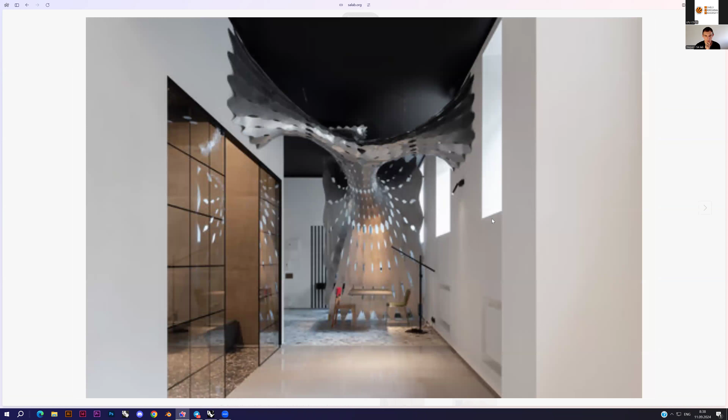It is designed with these parametric structures, mostly made of aluminum, and they are really thin, just 1 millimeter thin. We used Rhino and Grasshopper to design those parametric structures, and a lot of digital fabrication.

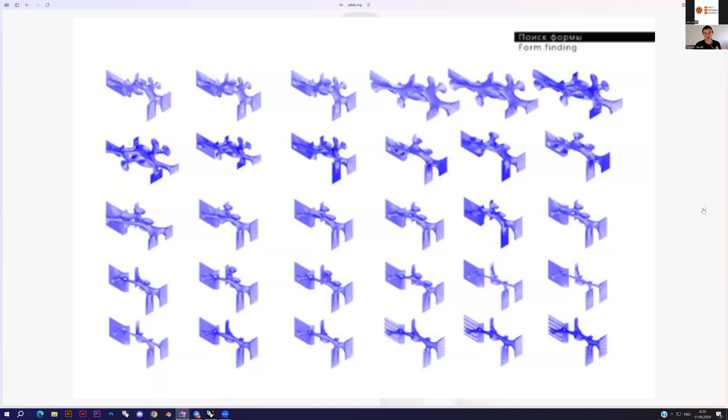We had a lot of form finding process going here. So we started with some simple shapes and then started experimenting, trying to develop a structure that would divide the space of the showroom while at the same time preserve its continuity, creating one space, yet divided into different functional zones. That's why we were experimenting with those structures.

At first we had an option with like 10,000 pieces, but then using Rhino and Grasshopper, we managed to reassemble it using 485 pieces, which is a lot less than 10,000. And of course, it takes less time to assemble, produce, and build such a structure.

This thing you see here in the image on the right was built, assembled on site in just 1 week, I guess. And altogether, I guess it took about 3 to 4 weeks to produce drawings, laser cut all the pieces from aluminum, and then assemble it on site.

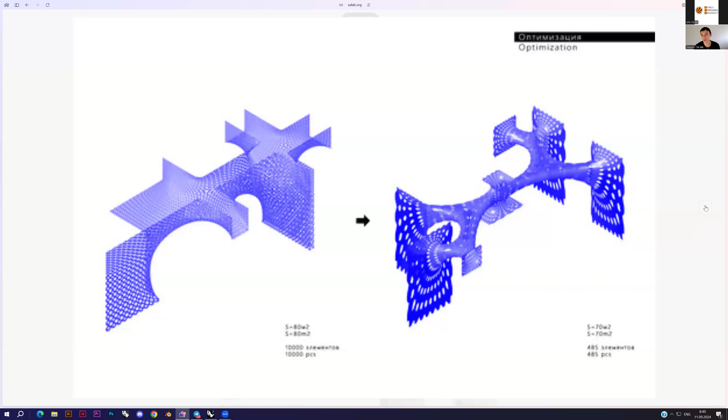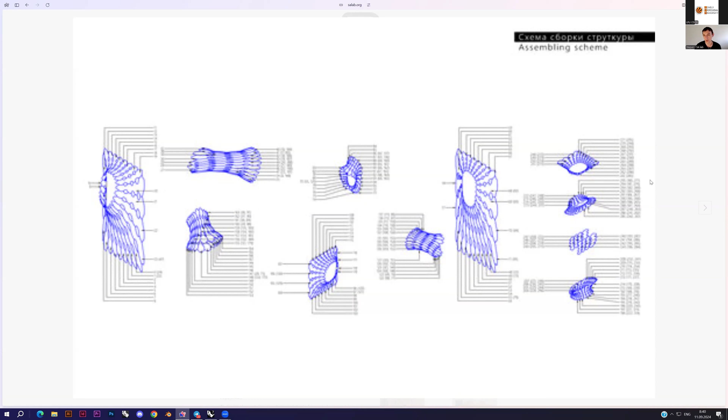This is basically how the cutting process and the drawings for the laser machines look like. It's just flat sheets of aluminum with some details on them. Later on, when everything is assembled on site, those flat pieces begin to take 3D curved shape and their final form, and they are grouped into modules, and then those modules are assembled together into a single structure.

In 2020, when COVID happened, we were about to design a few pavilions for a science festival happening in Moscow and then moving to St. Petersburg. We were supposed to create stage pavilions for this festival, first assembled in Moscow and then transported to St. Petersburg. But then COVID happened, and the festival that was supposed to happen offline had to move online.

We ended up creating virtual spaces for the festival. We created 2 virtual spaces using the Cellular Automata algorithm, which we are going to discuss today further on. Those spaces were used to walk around by the visitors.

Let me just show you so you can walk around, explore the space. You can climb on top of the tower. There are elevators and various steps and so on that you can take to climb on top.

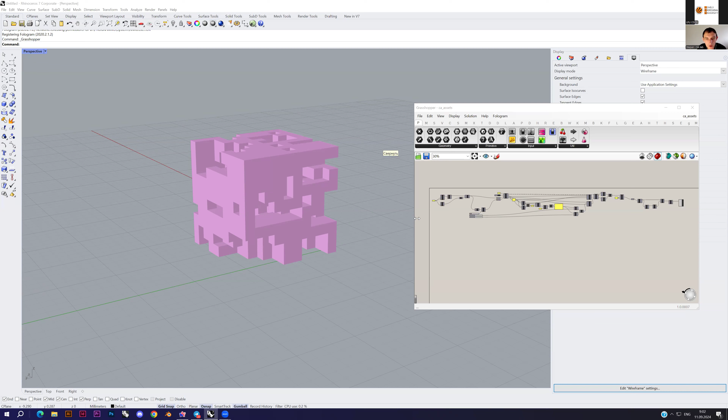So this is Rhino and this is Grasshopper. Grasshopper basically is an extra feature for Rhino. Long time ago, it was a separate program that you had to install to use with Rhino, but nowadays it's all integrated into the Rhino interface, and to launch Grasshopper you just need to use this round green button on your standard panel in Rhino.

And what is Grasshopper? It is a visual scripting language. It's kind of a programming language, but it's made with gray rectangles, boxes. They are called nodes, I guess. And each node is just like a simple command that is executed by your computer. It has some inputs that are necessary to control the execution of the command, and it has some outputs providing the results of these command executions.

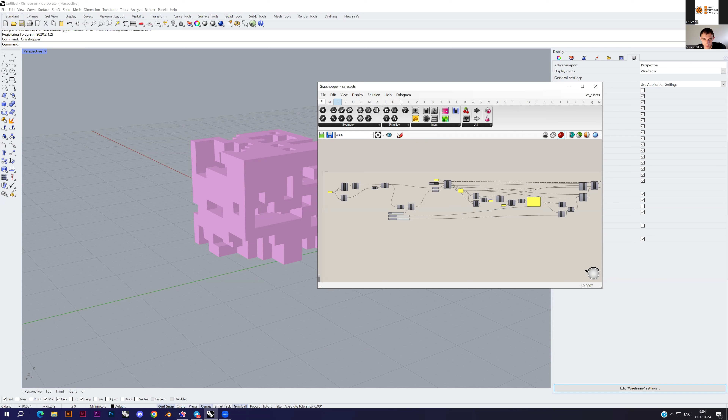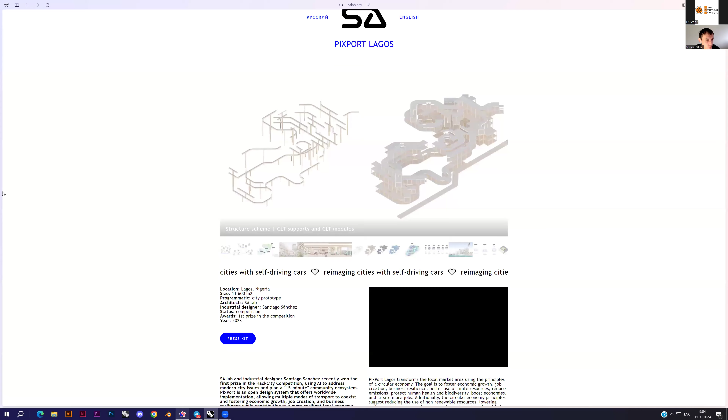So all the nodes in this file are native and available in the standard Grasshopper window, except for two. The first one is called loop start, and the second special node is called loop end. And those nodes are provided by a plugin named Anemone. And if you don't have this plugin yet, you can go to food4rhino.com and search for Anemone, and here it is.

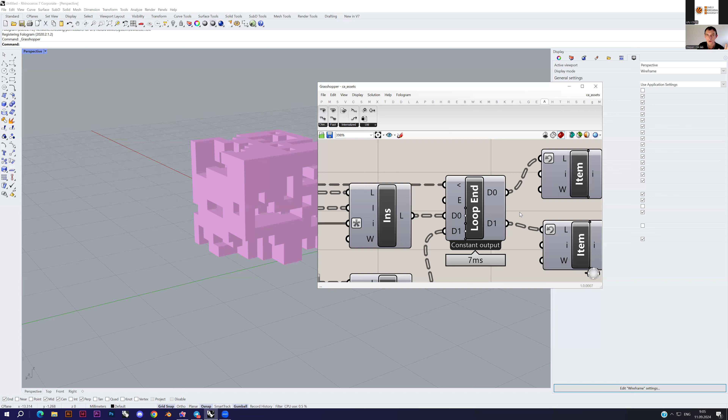So it was not updated, I guess, long ago, and what you can see here, the last version is 2015, but it's still working. And the idea behind this plugin is that it helps you create loops, some pieces of code that are repeated over and over, depending on how many times you want to repeat this code. I guess there are other plugins providing the same functionality as Anemone, maybe Hoopsnake or something like that, but for this definition I used Anemone.

And let's try to understand what is cellular automata and how we can implement this algorithm. So basically, cellular automata is a kind of mathematical model that was invented in the 1940s by two scientists from the United States. They were working on the idea of robots and kinds of machines that could reproduce themselves. So they were trying to find a mathematical description of this process when a machine can rebuild itself, repeat itself, and that's how they ended up inventing this cellular automata thing.

So in the classic case, it is a 2D grid, two-dimensional grid. For example, I have a grid like 4 by 4, but usually it's more. And I have cells in this grid. For example, here is the cell that I'm looking at. And this cell should be familiar with what's going on. And it depends usually on how many neighbors are alive or dead.

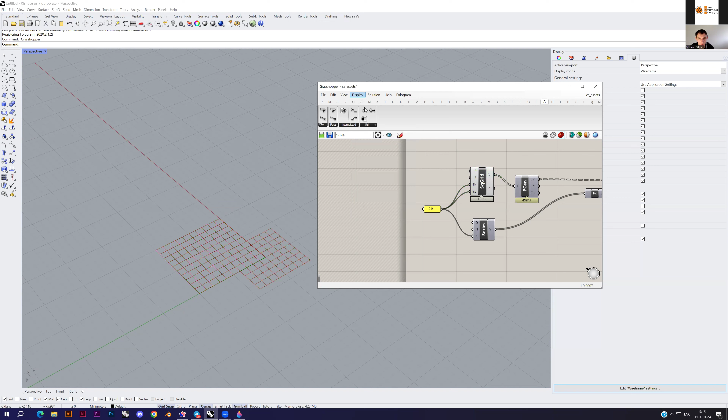So in our Grasshopper file, let me disable all I have and see what we have at the beginning. The first thing we create is a grid, created with the square grid component. It creates a grid of rectangular cells. Each cell is 1 by 1 size, and we have 10 cells by X direction, 10 cells by Y direction, and we want to make it all 3D.

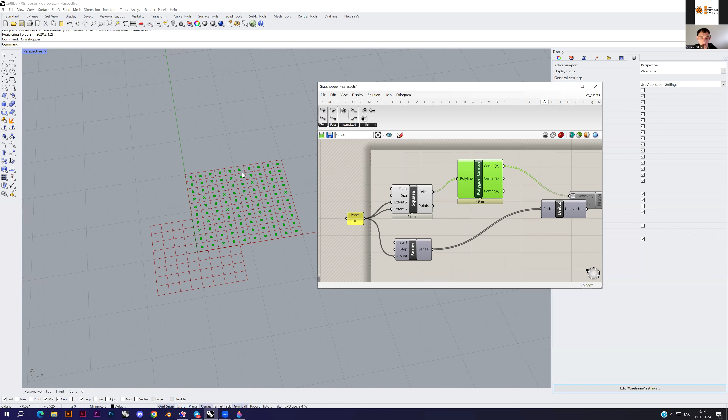We're going to experiment with the same logic that I just described, but implement it in a 3D grid. The next thing we need to do is to grab the centers of our cells and move it up to create a 3D grid structure. How do we do this? We grab our centers, we grab the move component, we have the direction of the movement - it's the z-axis, so we use unit z vector.

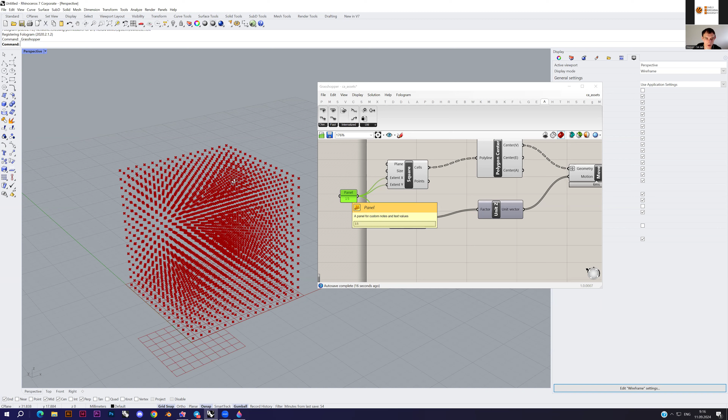Then we need to provide the amount of times that we want to move our initial points in the z direction. To provide this, we use the series component, and for the count input here, we use the same number of cells that we used to create our grid - so it's 10, or you can change it to 15, for example, to create a bigger structure. It depends on the hardware you use - the more advanced hardware, the more cells you can generate, the more complex structure you can create. I start with 10 because it's simple and easy to simulate, so you can understand how it all works before building something complex.

So if you're working with Grasshopper for the first time, you may be wondering what kind of wires these are. Some wires are depicted with a single line, for example here, and different types of wires depict different types of how information is structured and delivered from one node to another node.

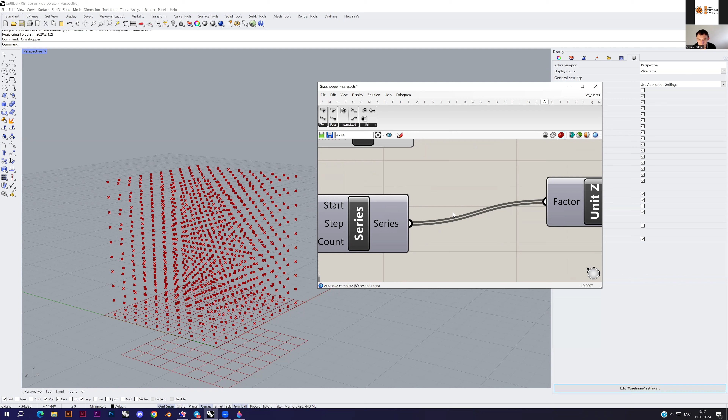For example, here I have a panel node, which is just a simple text node in Grasshopper, and I have a single line wire connection here. This means that in this wire I have a single data element being transported from the panel to this node. Here I have a double wired connection, meaning I have a lot of different numbers or data elements - here I have 10 numbers. So here I have just one number and the wire is a single line, here I have 10 numbers and it's a double wire, and here I have a dashed wire connection.

And this means that I have different lists with different amounts of data inside. So for example, if I plug in a panel, I can see what's going on inside. I see different lists like this one, 0, 0, 0, and the next one is 0, 0, 1. And in every list is some kind of data. For example, here is a rectangle depicting the grid cell.

You can think of lists in Grasshopper as boxes, for example, and you can have different items, a different amount of items in different boxes.

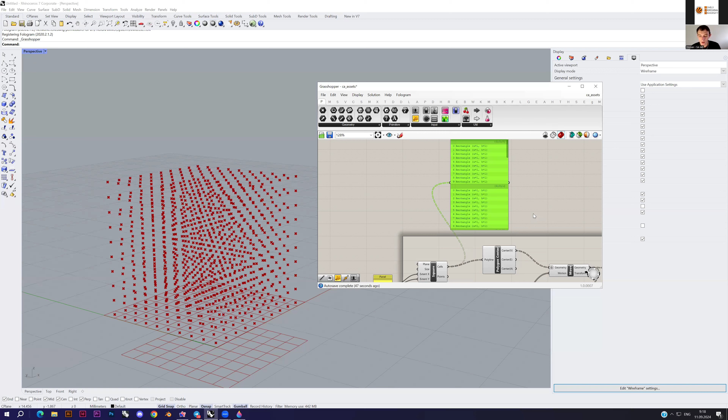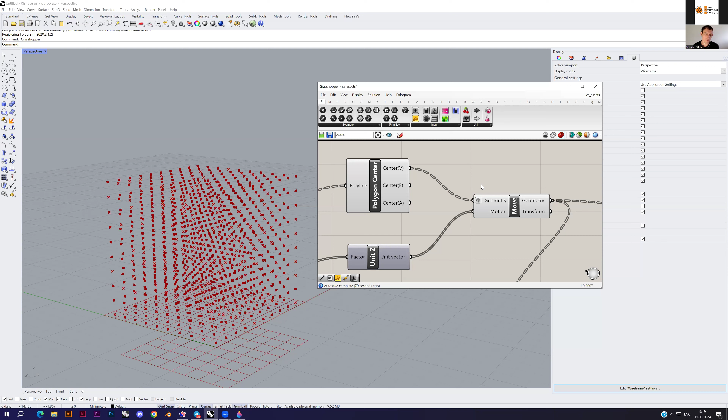There are different commands to transform and operate lists or data trees - it's also another way to call them. The most used commands are flatten, that combines all the data items in a single box, or graft. Graft command takes all the data items and puts every data item in a separate box, for example, in a separate list. And we need this graft command here, on the input in our move geometry node, to create this 3D grid.

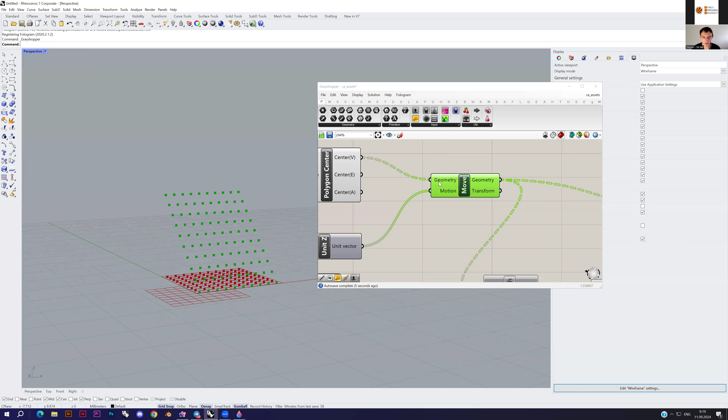If we don't use graft here, for example, you will end up with something like this. And if you use graft, you'll end up with a normal 3D grid that you want for our algorithm here.

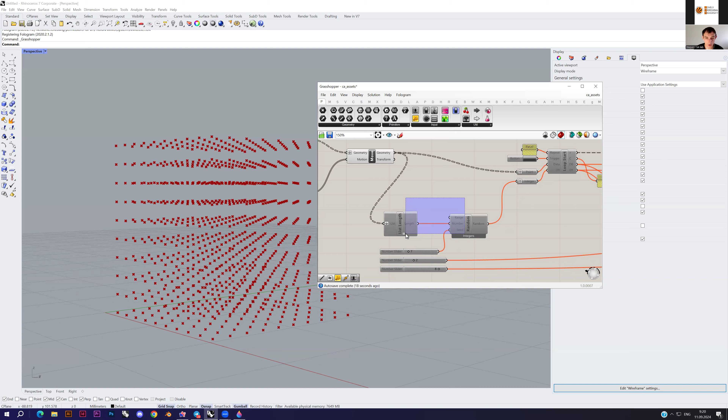So the next thing we're going to implement here is the random initial states. How do we do this? We just use a random component here. We calculate the amount of points that we have in our grid. We generate random integers, either 0 or 1, to generate random initial states for our cells.

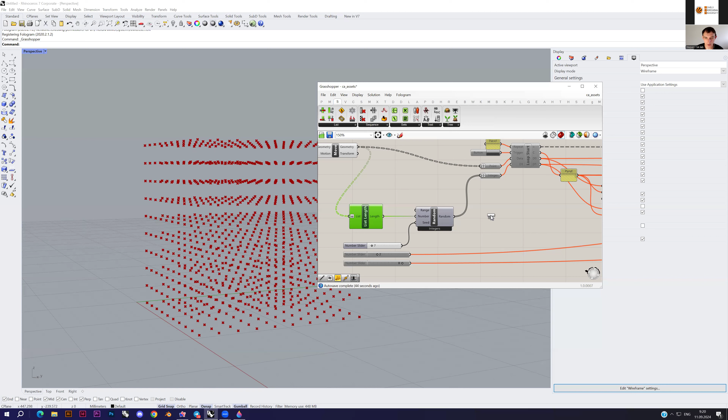And if we just see what happens here using the cull pattern node, you'll see that we have something like this. So we have our cells, but then some of them are just randomly removed. And we only have cells that have the random 1 state, and those that have random 0 state are removed from the visualization in our Rhino screen.

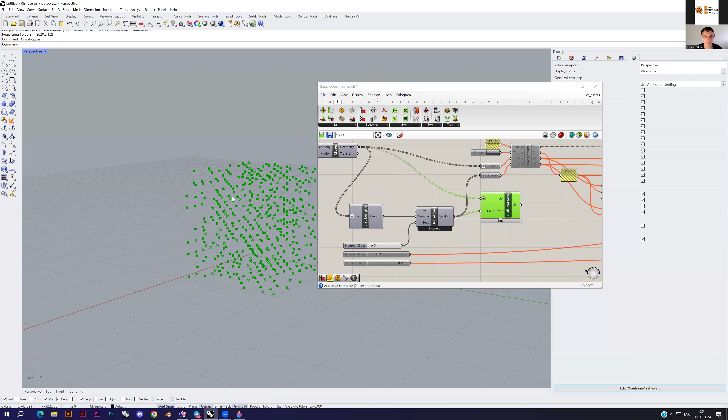But we need to record 0 states as well. We are not just removing the cells, we just provide them with different states, and we need to record all the states for us to be able to operate on them later.

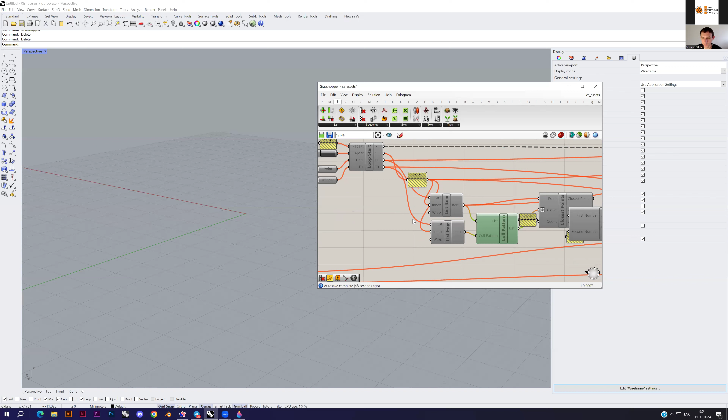Okay, let me just move those nodes a bit and get some space.

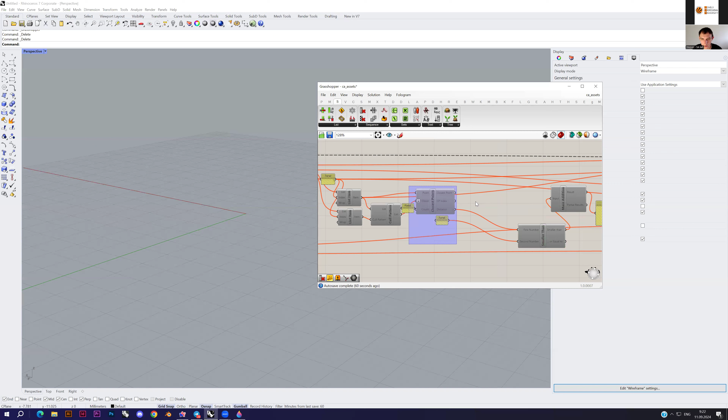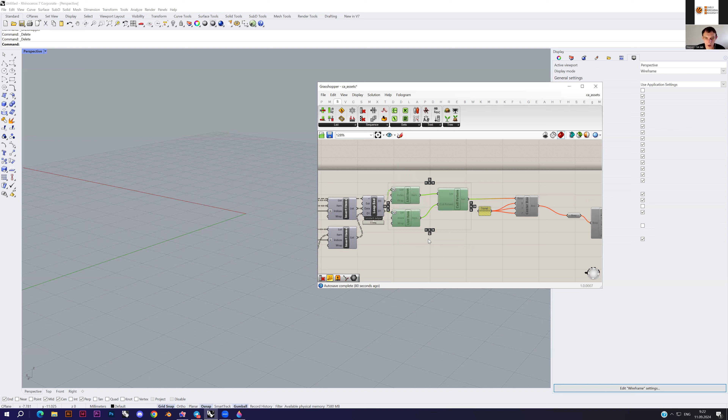Okay, let's see what happens in our loop. So our initial structure, our initial states, and our points, they are all provided as input for our loop start node here. And we have also the amount of generations we want to create.

You can control it with this panel. Instead of 3, you can type in 10, for example, and then the generation will continue 10 times. And you have a button to trigger it all from the beginning. You can control the seed value here in your random node to change the starting positions.

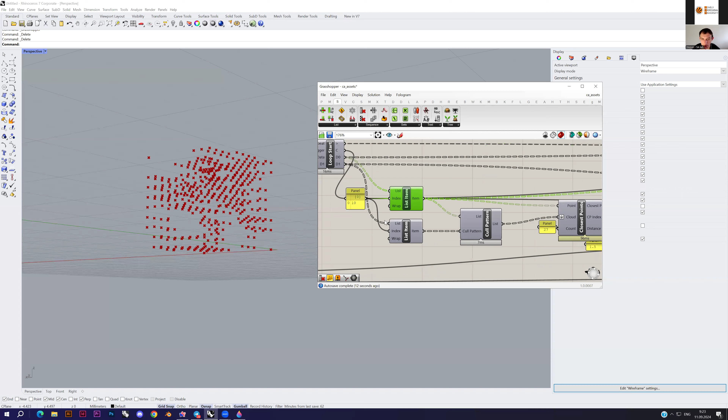And then what we do, for each generation, we get the number of points, we get the states for every point. We calculate the number of neighbors for each cell that are alive and have state 1, for example. And then we kind of calculate it all.

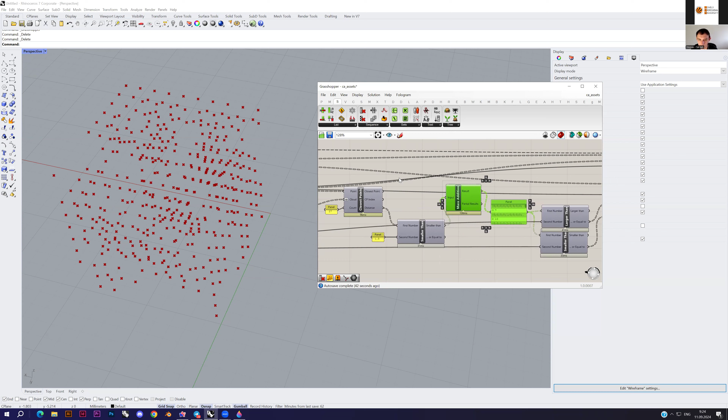So we get the closest points to our point that we're looking at. We just control the number of points that we are calculating using the distance. And if we have a cell which is 1 by 1 by 1, you want to use the distance which is approximately 1.5.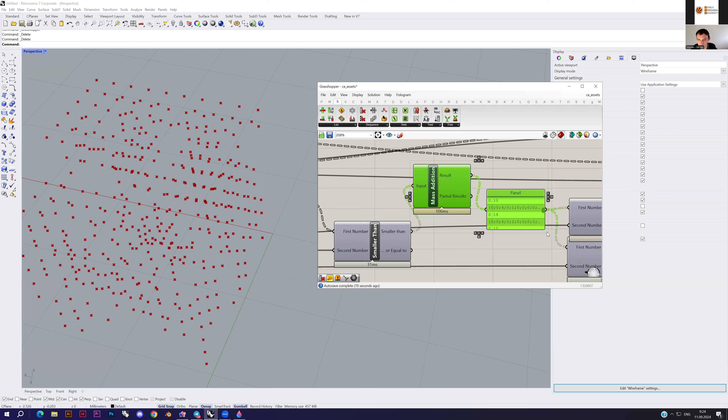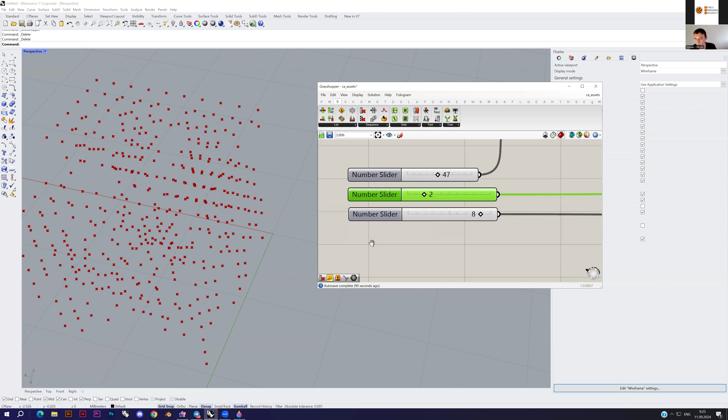You just then calculate the total amount of neighbors that are alive, and then you have 2 nodes that help you to define the rules. So here we are saying that if we have an amount of neighbors more than 2 and less than 8 - so for example, it can be 3, 4, 5, 6, 7, and maybe 2 and 8 also - then this cell is alive in the next generation.

And we kind of record this cell in our list of states and list of cells, and provide it all into the loop end data. And then we just get the last generation from here, from our loop end. So our last generation's points, last generation states for the points - we just again remove those that have 0 states.

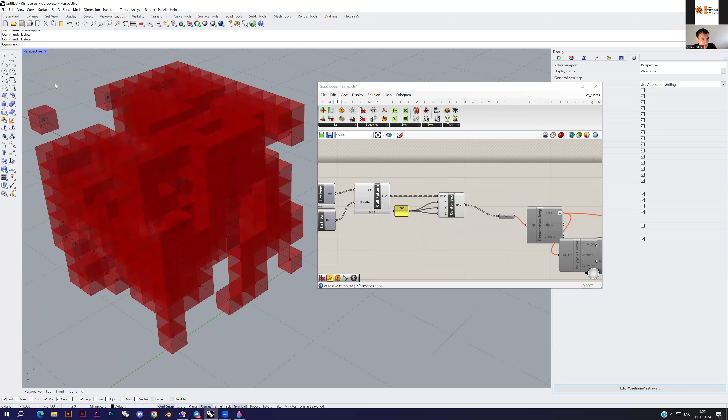And later on, we can visualize it all using a box, for example. We can create a box around every point here. Okay, and it will look something like this.

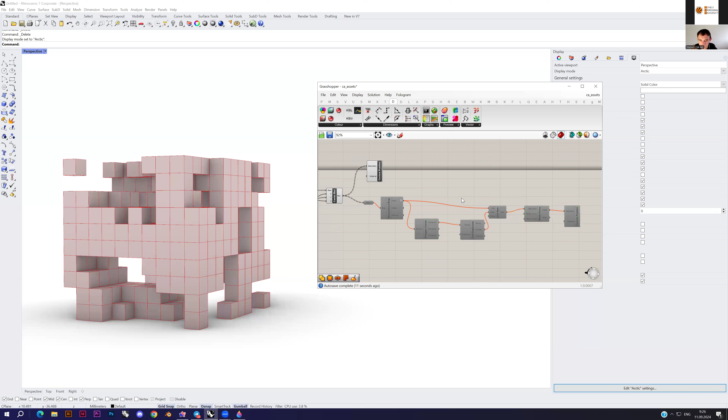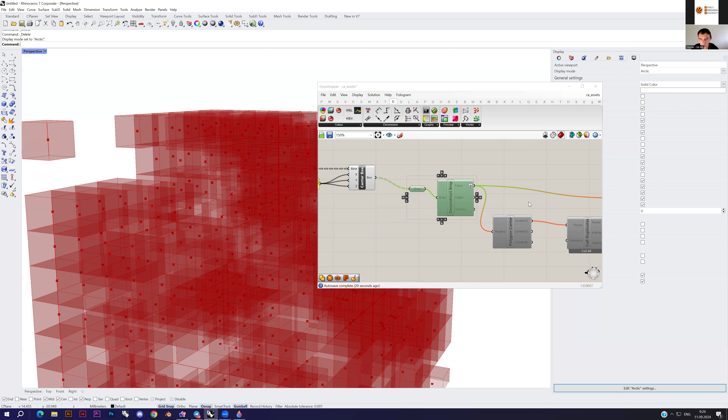And the last part of this algorithm is just to make it more clear in the sense of geometry. So if we just create a lot of boxes, we have a lot of polygons and box faces that are not visible to us, but still generated by our algorithm. So with this group of nodes, we just remove those that are not visible to us.

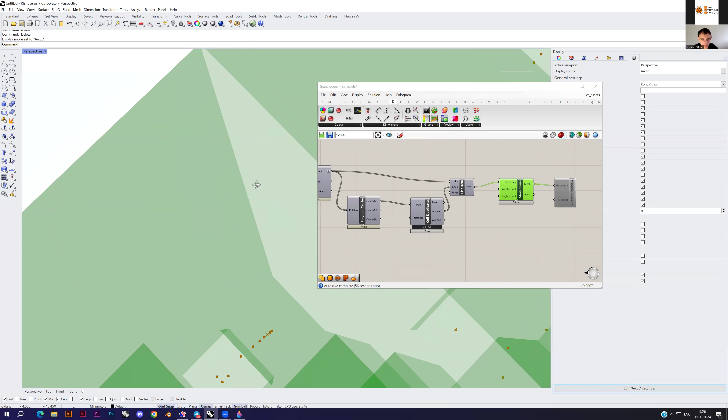So you will see that there are no hidden box faces inside. It's just like a single surface around those points. And we also transform it into a mesh just to make it easier to render, and we get a structure like this.

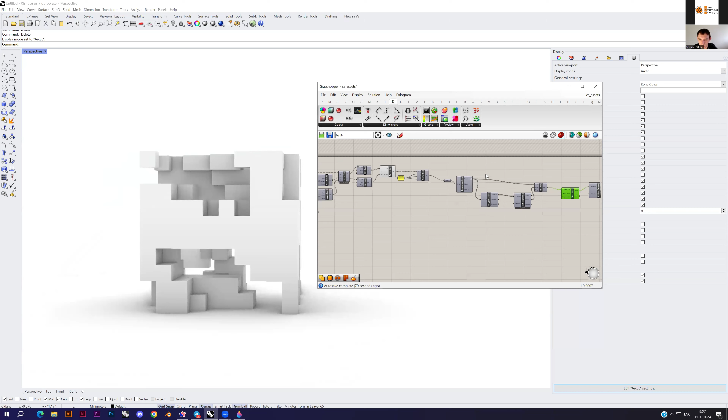So I can retrigger my calculation, and depending on the amount of generations, I get a different structure. I can come up with different rules.

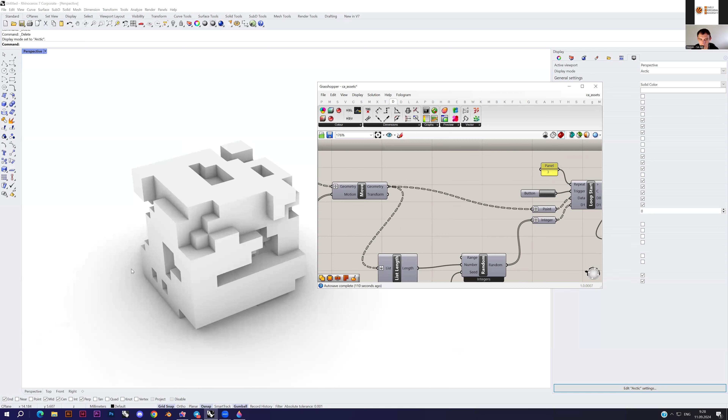For example, if I have only 2 and 4 neighbors, I will get a more porous shape. And if I use more neighbors, like 2 and 9 or maybe 3 and 9 or 3 and 9, I will get a more unified shape. If you set up 1 and 9, for example, you can get even something close to a box-like structure.

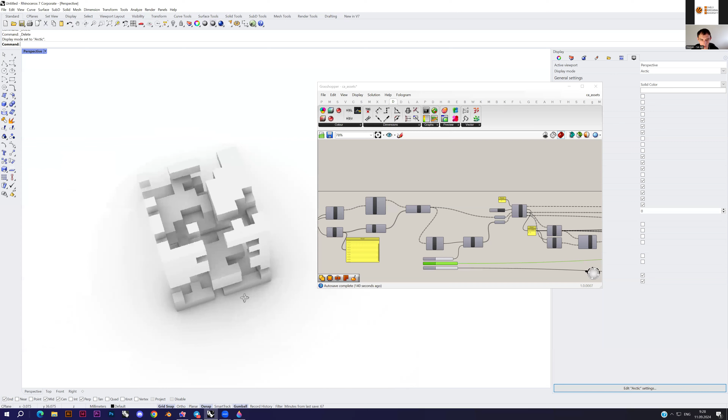So by experimenting with the rules and experimenting with the generations, you can create various kinds of structures.

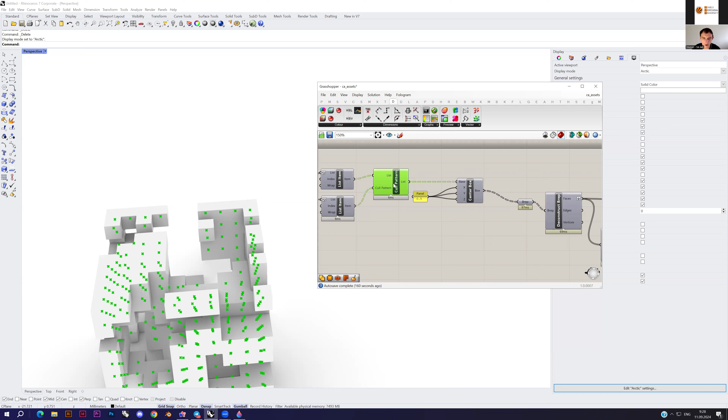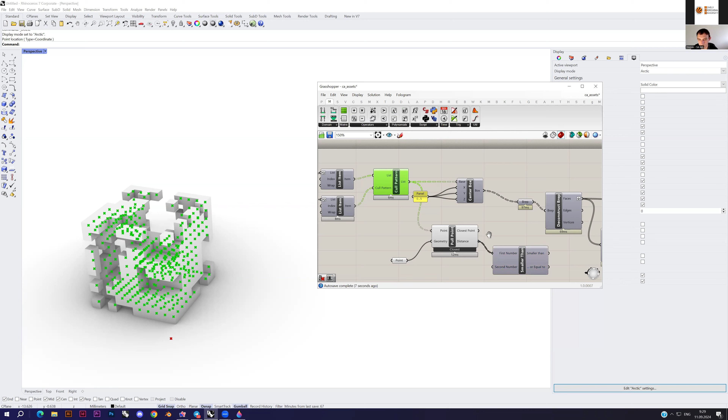You can also introduce some extra logic in our loop, or with the final points, so maybe you don't want some points to be generated in a certain area. You can add an attractor point somewhere, calculate a distance between those points and the geometry, and pick a distance that is smaller than a certain value.

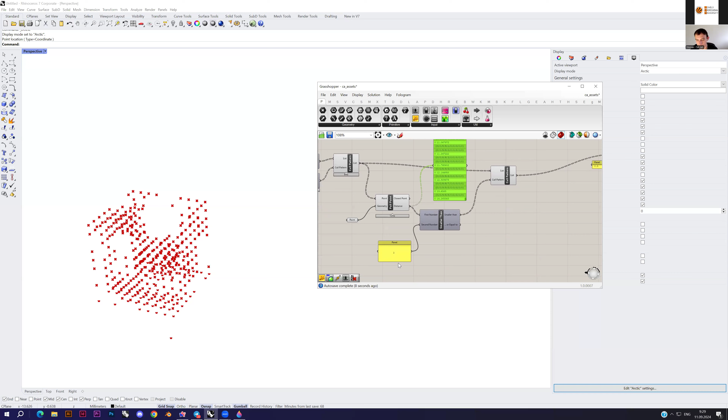Maybe 5 is fine, or maybe 3 is fine here as well. So you can just get rid of some tiles that are not okay, here I took only the cells that are close to the attractor point.

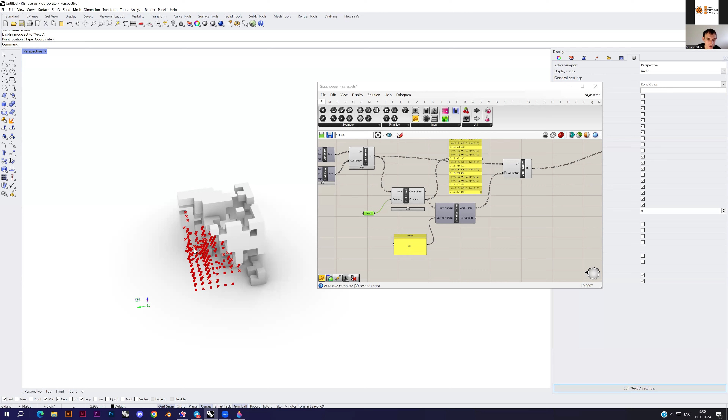Or maybe I can just grab only the cells that are far away from this attractor point, and that's how you can further control the geometry you create. For example, using this cellular automata idea in a city environment, if you have some buildings located nearby, you want to have some distance from those buildings, and that's how you can control your outputs using the attractor idea in your algorithm.

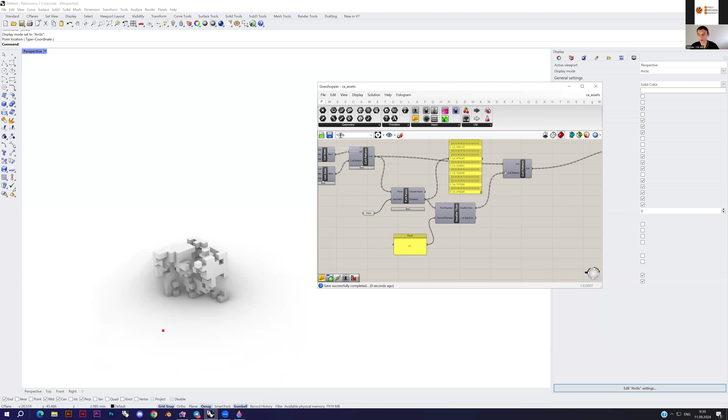Okay, and that's it. That's a simple idea that we are using in Grasshopper. So I hope everything is fine, and if you have any questions, feel free to reach out.

Do we need to make a break, or can we continue with our next phase of the workshop?

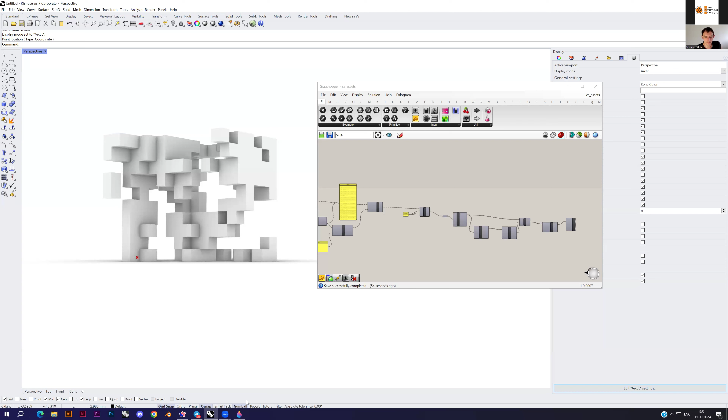Okay, so there is no need for a break. Then let's continue to web design and web design basics.

If you have any questions after the workshop, feel free to reach out. I hope I will be able to answer them and maybe provide some solutions. Okay, thanks, let's continue.

So our next step is web design. And for that,

I suggest using this Kodiia platform. Kodiia is a platform that we started developing in SA Lab during COVID times, because we were hosting workshops, experimenting with web technologies, creating virtual structures and virtual spaces, and we just couldn't find a platform that suited our needs. The platforms we were using were either specifically designed to build things or specifically designed to teach coding, for example. We wanted to create a mix, some kind of platform that provides tutorials with step-by-step instructions and some coding possibilities. So if you go to kodiia.com,

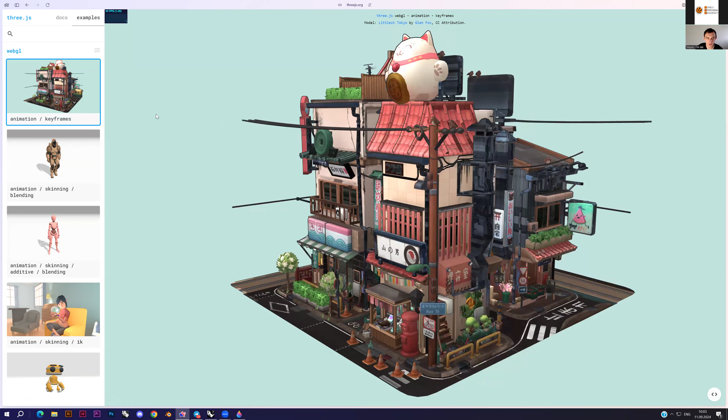That's it. And also there is great documentation for this library on how to create scenes, how to implement various stuff, and there is also an example section here showing various projects. There is available source code here too, so you can take a look at how this project was created. So this is basically a scene created in some 3D editor like Blender, for example, with animated parts, and then this geometry is uploaded to a web project, and Three.js is used to display it and play the animation. So all the modeling is made somewhere else - Three.js is not responsible for modeling. It is basically responsible for visualizing the 3D content in the web browser.

And then there are a lot of other examples. You can make ASCII art, for example.

Stephen, sorry for disturbing. The workshop looks great. Can we streamline it in a way where you show a student how to make a model and the student is parallelly doing the model? Can we streamline it this way, so that people get a better understanding and they'll be making some forms and exploring forms? Yep, no worries, okay, no worries.

So in your web app, you have a generate button that when you click this button, you get a shape and a structure, something like that. You have an export button to save this form on your computer, and you have these minimum neighbors and maximum neighbors options here, the same as we had in the Grasshopper definition.

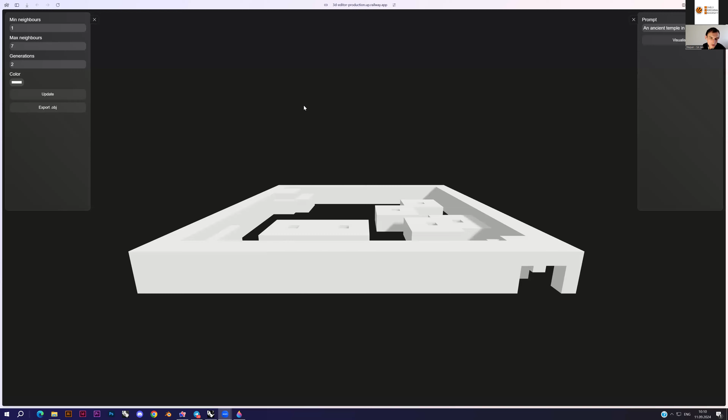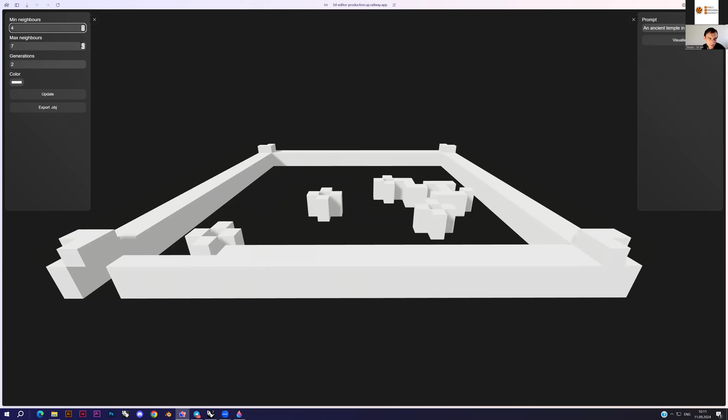This is the kind of experimental project that we've been working on lately. It basically provides the same idea, generating something with the cellular automata algorithm that we're discussing today, and it has some extra features here.

On the right you have a panel where you can provide a prompt describing what kind of 3D model this is, and then click the visualize button, and it will generate an image. It may take maybe 30, 40 seconds, maybe a minute to do this.

So feel free to experiment with it, but it may be buggy and not so polished. Again, other AI tools that are usually used for this kind of project are maybe ComfyUI.

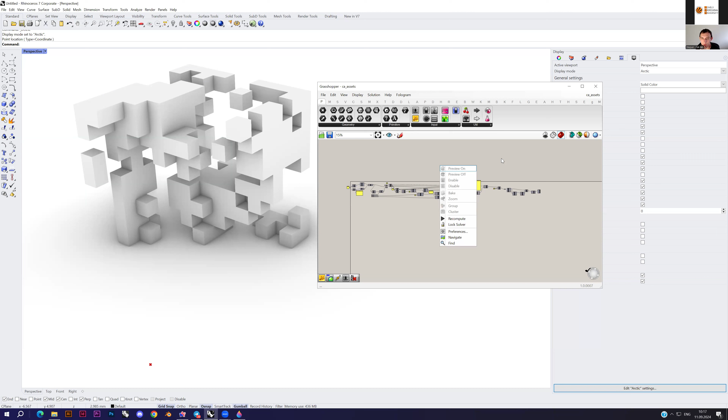Yeah, it's like a huge, for suppose let us say they want to create 10 floors of a different form, is it possible with this? It is possible in Grasshopper, for example. You can grab the points that you have here, and then maybe you have like a sphere, and you can create a sphere in every point, and you'll get a different shape as well.

Even more, you can create your own geometry, any kind, but then move this geometry to the points. So you kind of create an asset and then move this asset to the points' location and reassemble this structure, not of boxes, but of your assets.

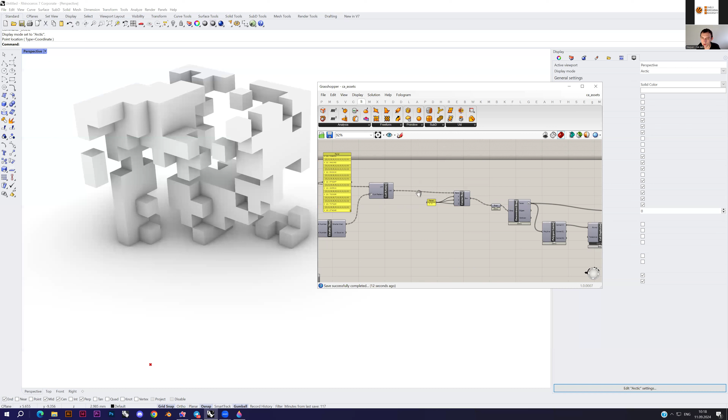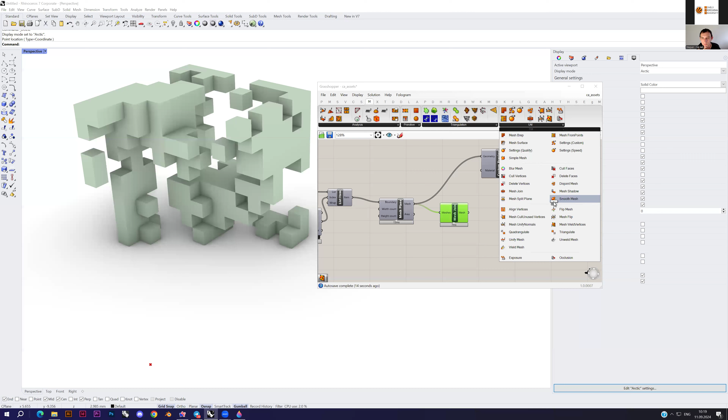And you can also make some smooth forms. For example, if you join this mesh into a single object and then use something like Weaverbird - I think I don't have Weaverbird here, but I have this smooth mesh here. Just I need more things happening here. Okay, using different plugins, you can modify this form.

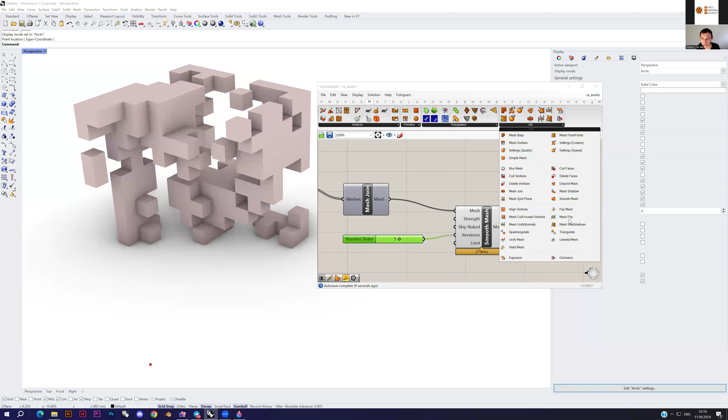Okay, so this smooth thing is not working here. Mesh join, weld vertices. Yeah, okay, this thing works. So here, for example, you can smooth your mesh and make it not so box-like.

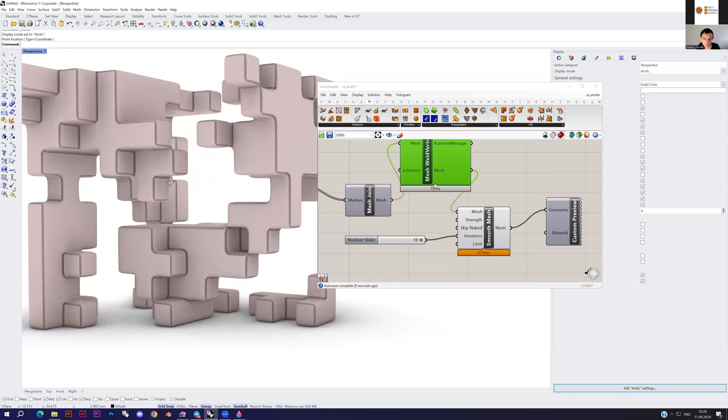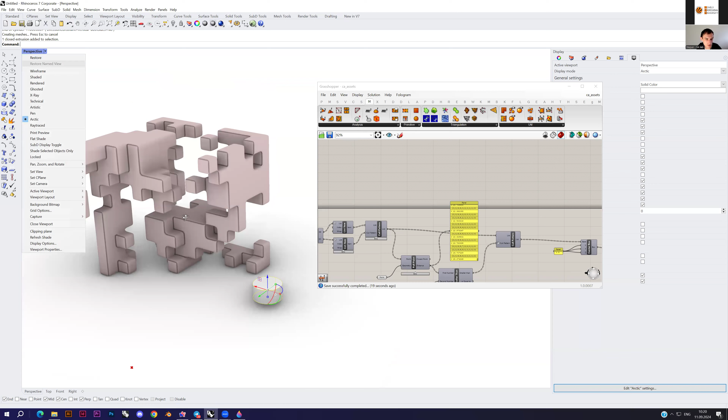And the idea that I was talking before is, for example, if you have anything modeled in Rhino, like let it be a cylinder shape, just as a quick example, you can grab it, let's move the shape to the start of the coordinates, and grab it in Grasshopper.

There is a geometry node, for example. Set this shape here and create a vector from the starting point - let it be start of the coordinates - then to your points that are generated by cellular automata, and then use this move node just to move your geometry to every point. And here you have your cylindrical shapes implemented to the points' locations.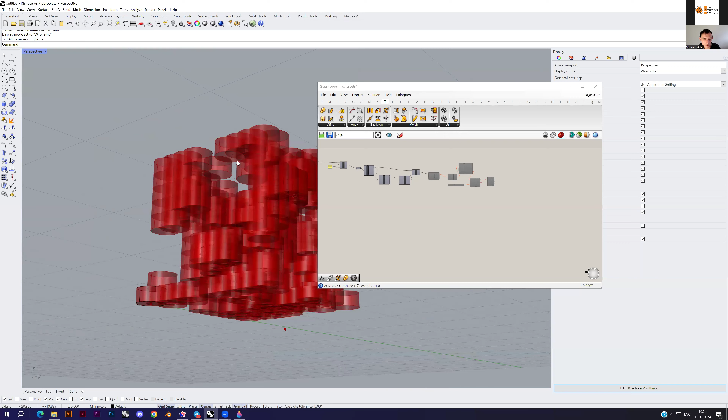And with the particular script, can you show us, like my students want to explore, can we create any skyscraper type with this type of script? With this particular script, can we explore any high-rise structure type if possible? Yes, of course. You can control it with those initial conditions.

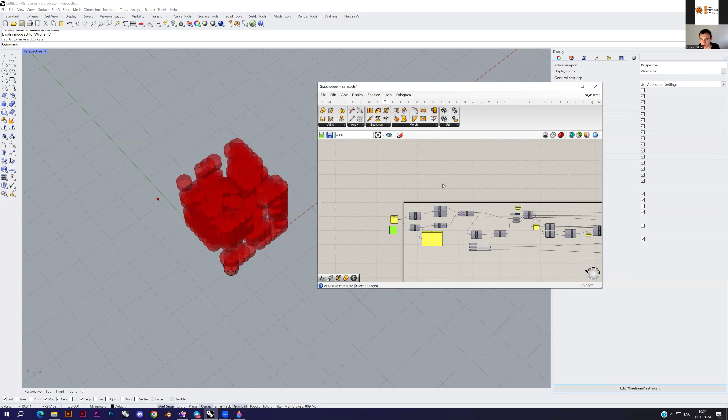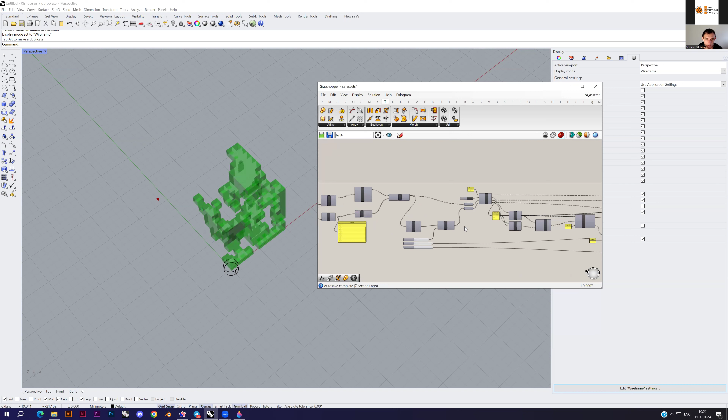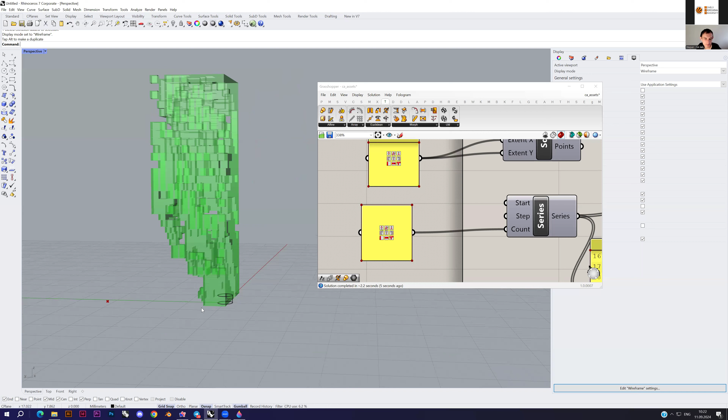So here we have a grid which is 10 by 10 by 10 stories high, but you can create like 30, for example, stories high. Just let me remove this thing. Okay, mesh plane, enable, just fixing the rendering back again. Okay, so if we want something like a skyscraper, just plugging your count thing, and here you are having a vertical structure. We still have our attractor here that removes some points at the bottom of the structure. Okay, so there you go.

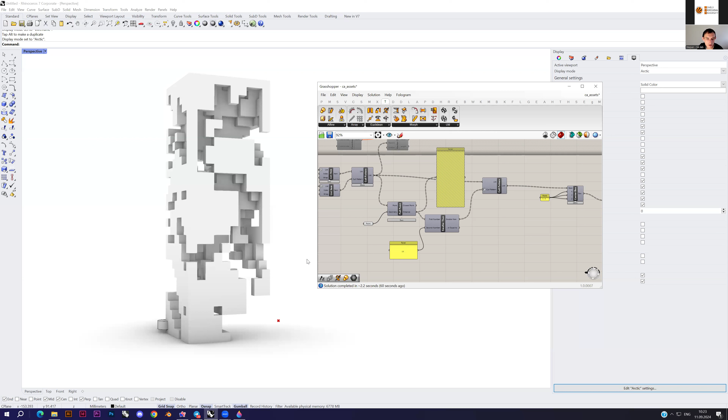Stephen, there's a problem we see - we need to download the Anemone plugin you told us about earlier. What we're facing is that it's downloading and working only in Rhino 4 and 5, not in 6 and 7. I'm using Rhino 7 and it's still working for me. Okay, really? So a few people queried that it's not supporting their version. All right, we'll check it again.

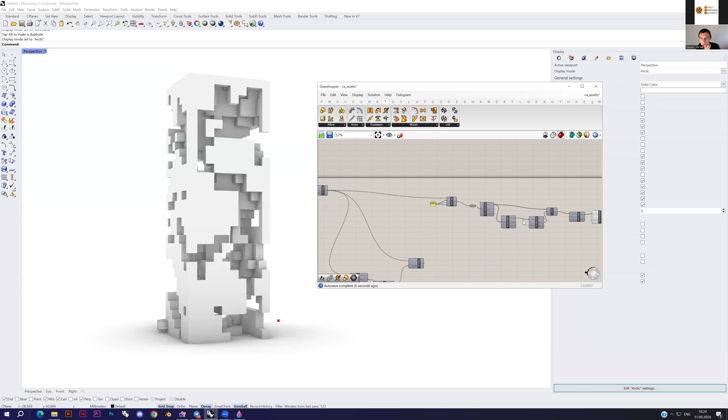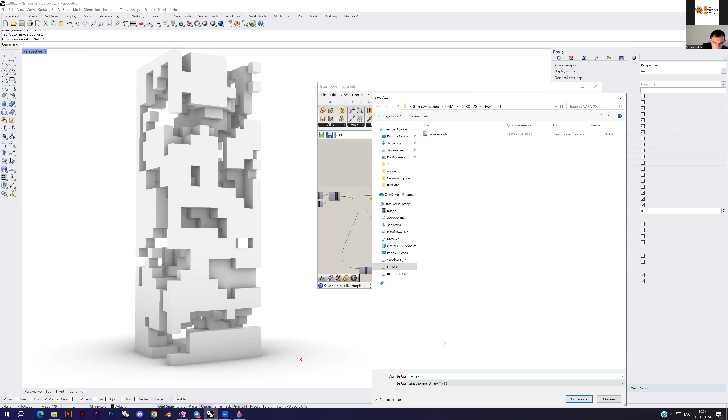Let me save this as CA_high, and let me share it with the document. Okay, so I shared the updated script. Yeah, I got it.

Can you suggest some models or checkpoints for stable diffusion specifically for each category, like model making, render, or concepts? I don't think I can really provide helpful information here. In my experience, right now I'm using just a Stable Diffusion XL model with some ControlNet to grab the overall composition. I know people are creating their own fine-tuned versions using LoRA and other techniques, training on image libraries for a specific style or geometry they want the model to produce. So I wouldn't say there's a one-size-fits-all universal solution - you have to use different LoRAs and different model versions for different tasks you're trying to solve.

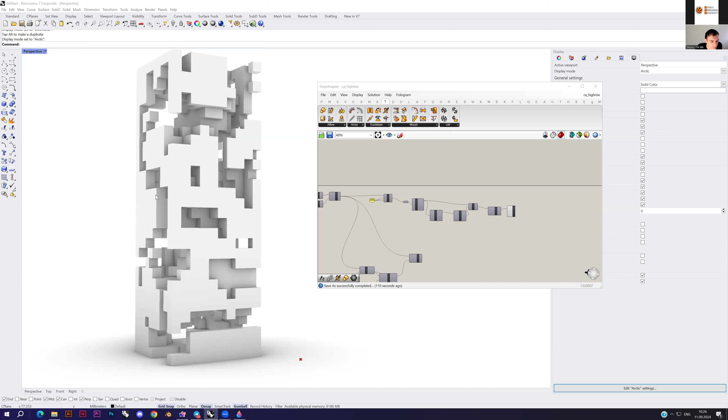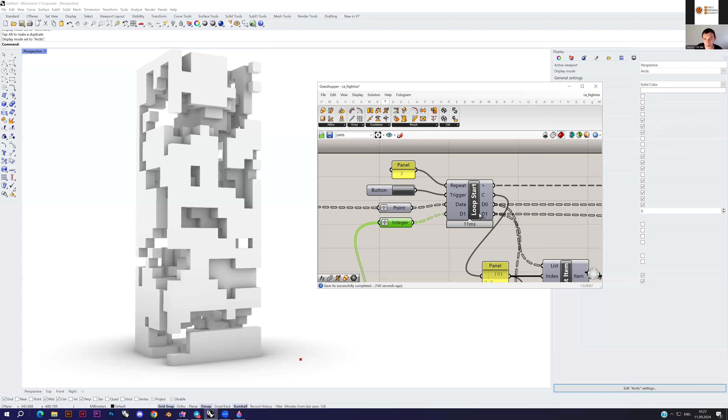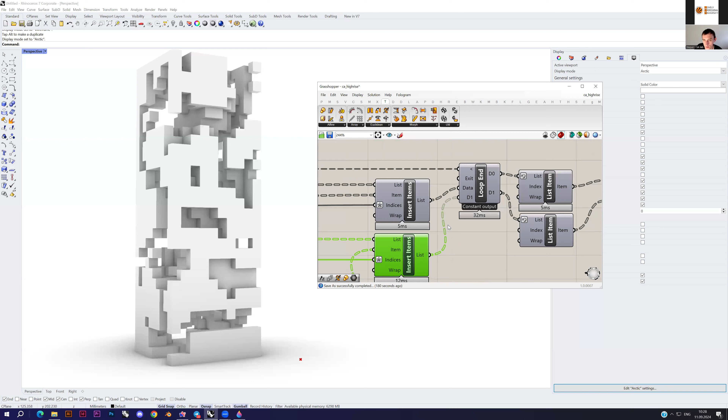We have two components from the plugin. The first is called Loop Start, the second is called Loop End. It creates iterative logic between those two components. In the Loop Start component input, we have the number of generations we want to create - how many times we repeat the code between those two components. We have a button to trigger the generation. We have a point list as our data input, and if you zoom into this component you can add more inputs using the plus buttons. The second input is our states, like zeros and ones for our points. There's logic between the two components - cellular automata logic that calculates the amount of neighbors and then creates a new set of points and new states for those points, which are fed into the Loop End node, and that's it.

All right, so everything is included in the script. Yeah, we'll explore that. Stephen, that was an amazing body of work you've shown us, and I think it's bombarding their brains - people are having lots of questions and queries. It took time for them to digest that this is all happening outside India. It would be wonderful if you could comment on their work when they submit today by 5. We'll be adding all these works to our Instagram, and we'd like your Instagram ID so we can tag you along with the students' work, so you can comment on those works if they have any queries. I think that would be a nice session.